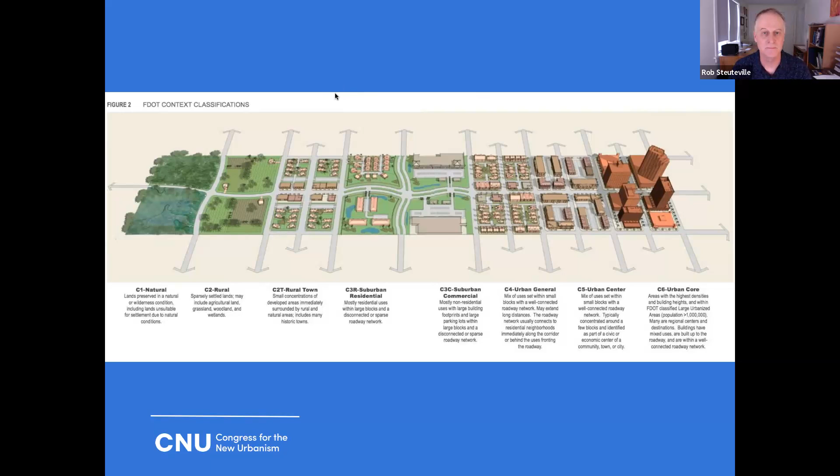First, there's going to be a presentation followed by a brief discussion among the panelists, and then Q&A from the audience. So please use the Q&A function of Zoom to ask your questions as they occur to you. I'm going to pass this along to Billy and DeWayne.

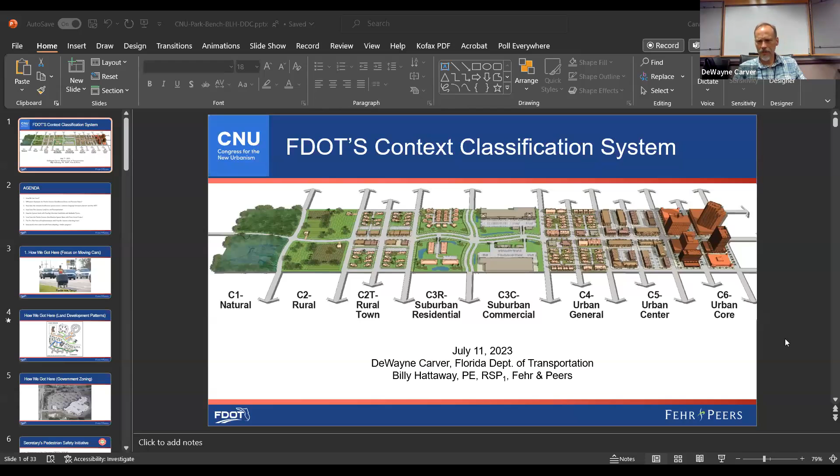Thank you, Rob. Okay, I'm sharing my screen. Perfect. All right, Rob, are you seeing our screen? I don't know that I am. I am. Okay, good, and it's in full screen mode. Perfect, DeWayne, thank you. All right, great.

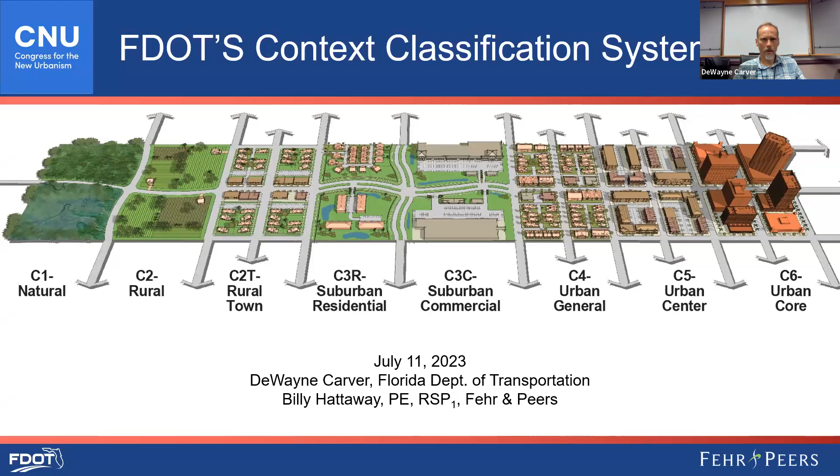DeWayne and I have included our emails at the end on the last slide, in case you have further questions, you can always email us. Rob, how will questions be answered if we end up running out of time and you have additional questions? Is there any mechanism for following up, or should they just contact us directly? They could put the questions in the chat, or email me or email you all and get more questions answered.

Perfect, thank you. Go ahead, DeWayne. So as you saw in the first slide, we're going to talk about how we got here. From a transportation perspective, having been at Florida DOT for 28 years and having been in the industry for 45 years, most of which was in Florida, our focus in the transportation industry has really been on moving cars.

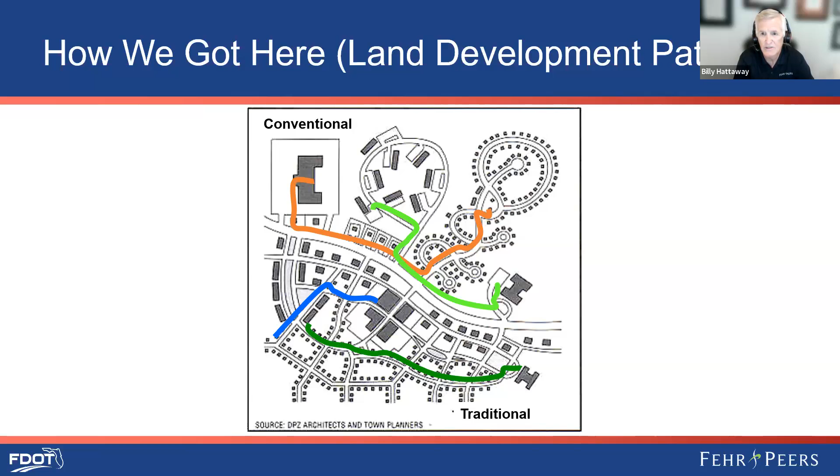Next slide. When I talk about the fact that it's not just the network, but it's also the land development regulations and government zoning by local agencies - Florida DOT does not control the adjacent land uses. That's controlled by local governments. They have a role in creating these issues because, again, cul-de-sacing these developments onto the state and U.S. highway system along with their own roadway systems.

So how did we get here? Back in 2011, the Complete Streets Coalition, an element of Smart Growth America, put out a report called Dangerous by Design. And basically it said these four major metropolitan areas in the state of Florida were the most dangerous in the country for pedestrians and bicyclists.

And the secretary had recently brought me back to Florida DOT to be the district secretary in Southwest Florida. At our first secretary staff meeting, he said, Secretary Hattaway is here to help lead a statewide initiative to improve pedestrian and bicycle safety. And he said, while we are always proud of being #1 as state transportation agencies in so many areas, being #1 in pedestrian fatalities and serious injuries is not where we want to be.

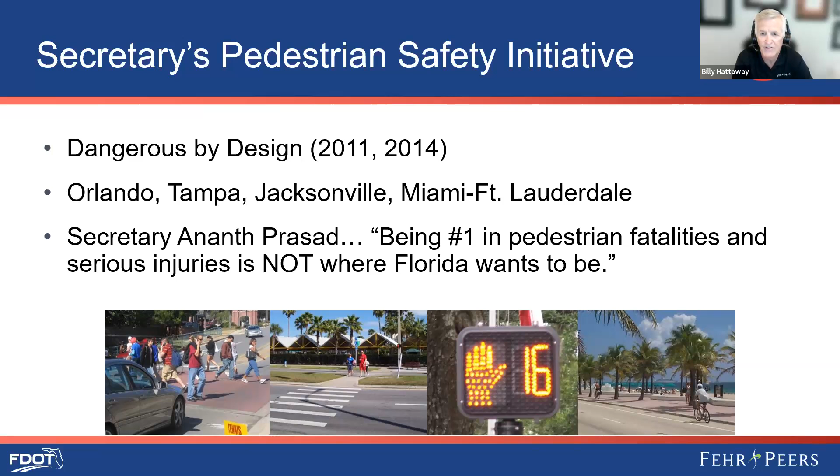Next slide. A big part of the problem is that almost all of our system, the Florida DOT state system, our posted speeds are generally in the range of 45 miles an hour on our arterials. We do have lower speed roadways through communities, but by and large, most of our 4 and 6 and 8 lane roadways are 45 miles an hour and higher.

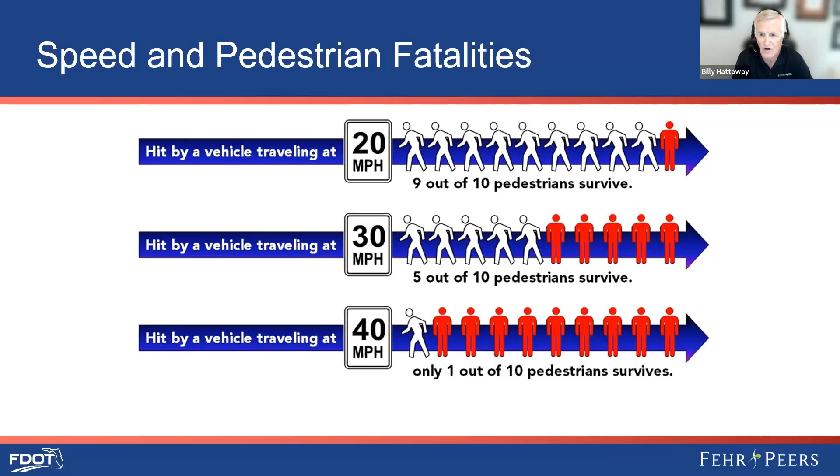And you can see if you get hit by a vehicle at that speed, only about 10% of the pedestrians survive. And chances are you're going to have a lifelong disability that you just cannot overcome. Likewise with 30 miles an hour. So low speed is a key element that we're going to talk more about throughout this presentation. Next slide.

So in fact, in 2014, DeWayne and I went to the Probike Pro-Walk Conference, and we wrote this policy. I had convinced the secretary at the time that we couldn't keep designing our streets the way we were and expect different results. That's always been known as the definition of insanity.

So we wrote this policy at that conference, and the secretary signed it, which was the start of our journey into Complete Streets. And then the Complete Streets Coalition - I'd run into the executive director at the time, and he told me that they had just finished helping another state agency develop their complete streets implementation plan. And I said, I'll be calling you back shortly.

The result of that is because of the implementation of the context classification guide and the incorporation of all of this into our design manual, the Complete Streets Coalition actually provided Florida DOT an award for what had been done in the state of Florida, which I was gone at that point in time, but I was very proud of the work that continued on, thanks in part to what DeWayne and Michael Shepard, the state roadway design engineer at the time, did. Next slide.

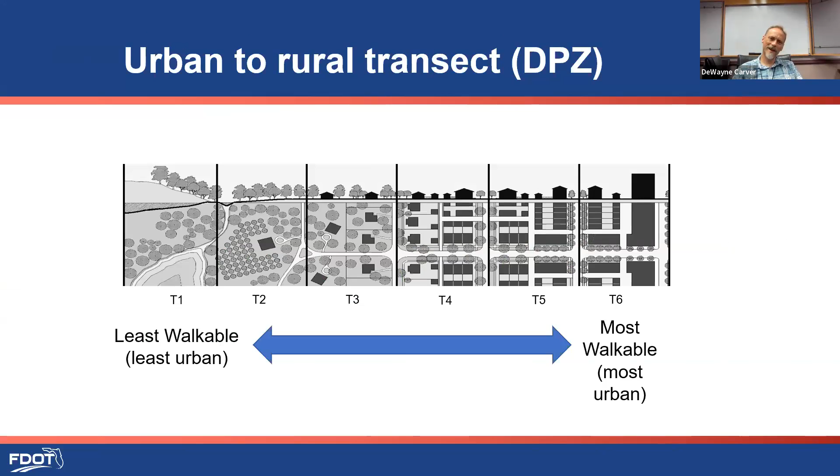You can begin to assign aspects of the built environment based on where you are in space along that. So it doesn't take a lot of imagination to go from that up to this, which is our context classification system. This is, in a way, great.

And we love the fact that we have this context classification system. But in talking to new urbanists, sometimes this will throw you a bit, because you may want to think that this is a one-to-one kind of thing. And it's not quite that way.

I'm going to talk a little later about how this fits into your form-based code if you have one. But the key thing to take away is that the purpose of the context classification system is to give your transportation folks a way to think about the roadway.

And in Florida, the DOT controls the road. We do not control the land use. And so we could not have a system that required the department control the land use in order to classify something.

And so the way our system is set up, the context classification is actually kind of reactionary. Now, it'll let you do things in the future as well, but it starts by looking at what's on the ground today. So if you imagine this is your state road going through the middle of the diagram here, from left to right, you see it passes through all the areas we'd recognize as transects.

My C1 natural conditions, C2 rural, I have a rural town there. I go through my suburban areas, getting into general urban on the right, and then working my way over to my urban center and then my urban core.

Now, in most new urbanist areas where you've used new urbanism and applied the transect, you'll have all of those done. We made a few changes to this for our context classification system that sometimes trip up new urbanists.

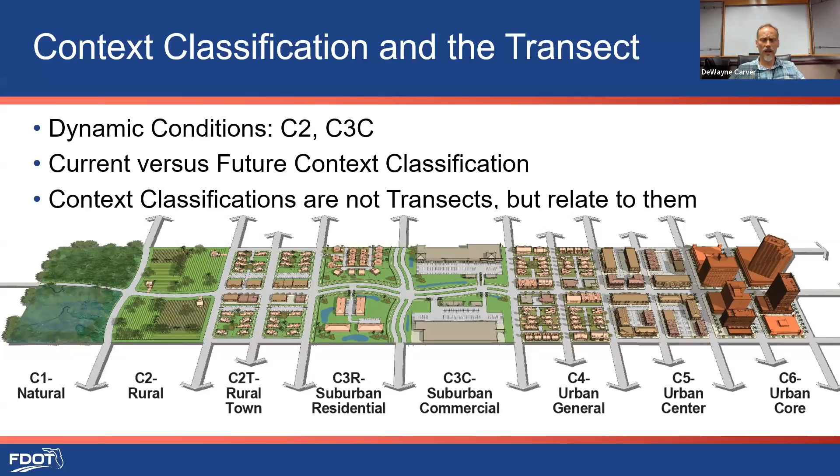This system matches up very closely with what AASHTO has done in the latest version of the AASHTO Green Book, which allows us to dovetail and think in unison with what AASHTO is doing.

So moving on from this, the next great thing about doing this is that it allowed us to create a common language. Rick Hall, who I used to work with at HPE, likes to say the planners speak French, but the engineers speak German. One of the things we did as new urbanists is learn how to translate between those two, and that's what this context classification system was designed to do.

In the past, transportation engineers kind of understood arterial and collector, urban and rural, but that was about as deep as it went. Planners had a hard time conveying why an urban arterial in a downtown would be different from an urban arterial in a rural condition, particularly in terms of speed and design criteria. This was a way to try to get us on the same page.

So we're going to try to create a common language. If you go to the context classification guide—and I'll put a link in the chat in a few minutes so you can take a look—you'll see there's a matrix in there. We call it the matrix.

This matrix on the left-hand side is the information for the planners. It talks about your context classifications and tells you what those would look like in terms of the physical characteristics that would matter to a planner.

Across the top is really the information for the engineers. It talks about intersection density, block perimeters, block lengths. Then there's more information that gets back to the planners about building heights and placement, but these are all things that can be measured.

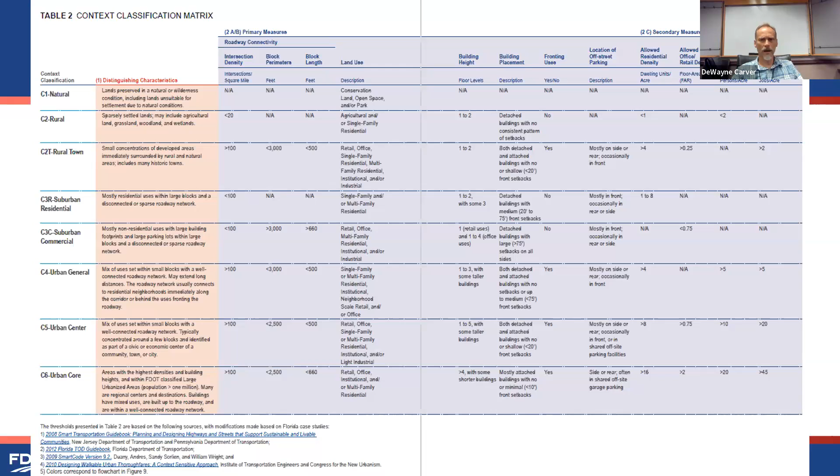This really is the Rosetta Stone that lets you go from talking about roads to talking about places. I want to enlarge this top column so you can see on the left-hand side there's the roadway connectivity measures, and then we have the secondary measures for planning. So this is what allows us to make that connection between what the planners are looking for and what the engineers are looking for.

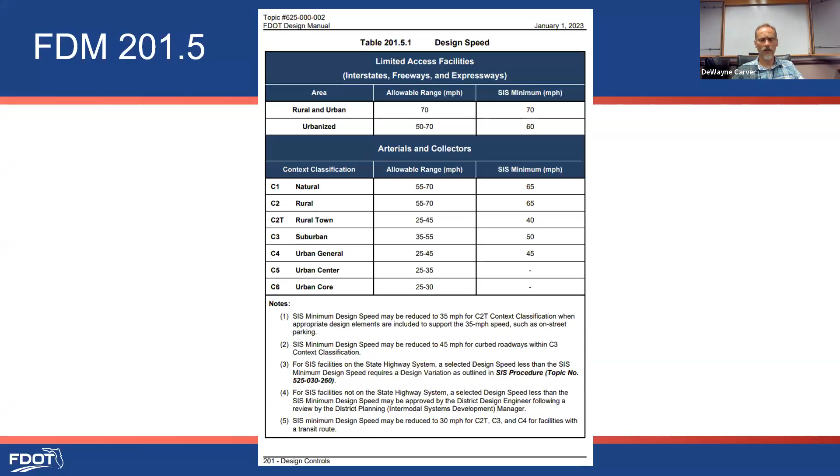There's a lot of criteria affected by that. The most important one really is design speed. The context classifications are assigned a range of design speeds based on how fast we want the traffic going, and that's directly reflective of what kind of character we want that area to have—do we expect a lot of pedestrians, cyclists, and transit there or not, what kind of movements we're expecting, what kind of traffic we're expecting. That's all covered in our FDOT design manual.

So here are our classifications again, and this is one of the ways Billy said we would come back to speed, and this is how we're kind of making this play out. So you have your context classifications, you have your state road. We need to convey to the engineers how fast we want things to move on these roadways.

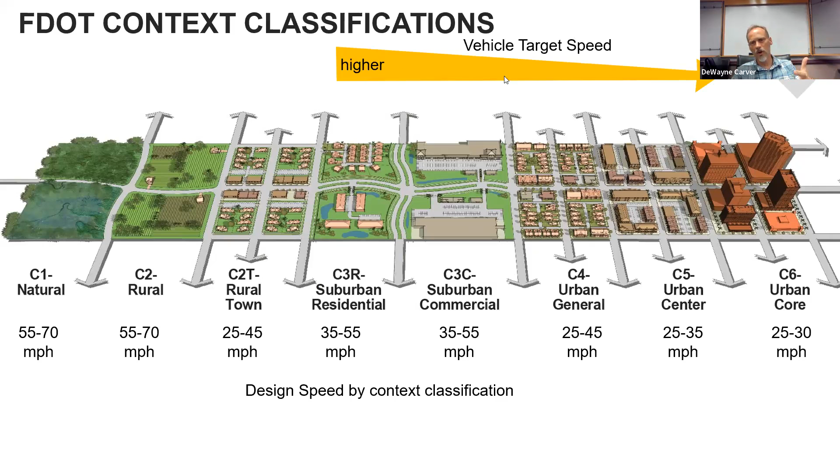The idea is that if you're in the most suburban conditions, you may start in C3 where you have higher design speeds, and work your way down to your lowest speeds, which are going to be in the highest context classifications. Now, if I'm in a rural condition on my state arterial system, it's okay to have high speeds there because I'm just moving lots of traffic very long distances. Speeds are going to go up there.

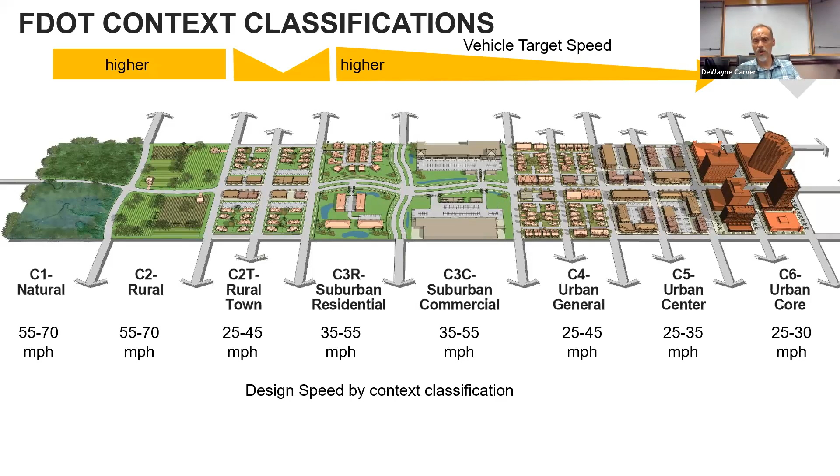But when I get to a small town or someplace, I've got to transition my speed down and then back up again as I leave. So this is just sort of a visual of how that breaks out. And the context classification system allows the planners to converse with the engineers about where we need these speeds to be. And then the engineers get it. Once they see this kind of thing, they're able to understand this is what we need to try to achieve. Now achieving it's much harder, but understanding that you need to achieve it is actually very helpful from this.

Okay, Billy. Billy's going to talk more about connecting land use and transportation, sort of generally beyond just what we've done at DOT, but kind of starting with that. Back to you, sir. Sure, thank you.

So going to how we got here to some extent. The plans preparation manual originally recognized only two types of speeds: high speed, which was greater than 45 miles an hour, and low speed, which they considered less than or equal to 45 miles an hour.

One other thing that is helpful for you to understand is that at the same time this plans prep manual recognized only two speeds, our minimum design speed on any corridor, regardless of context, historically was 45 miles an hour. So if you were going through the heart of a downtown, the design speed would be 45 miles an hour.

Likewise, whereas the Florida design manual recognizes the 8 contexts with the associated speeds, as DeWayne just mentioned. Next slide.

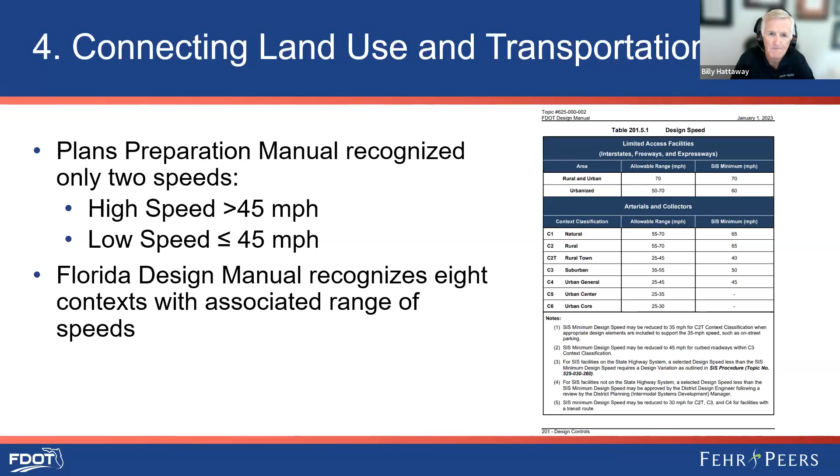So you can see, as he mentioned previously, the range of speeds on this chart. The one thing that we were able to get in place, and DeWayne's going to talk more about this later, is the target speed. So the target speed, the design speed, and the operating speed, we want them to be the same.

So the days of adding 5 or 10 miles an hour during the course of design to what was the intended design speed is something that's historical. We are no longer doing that, nor should anyone in the industry be adding additional speed to what the intended posted speed is going to be once the project is built.

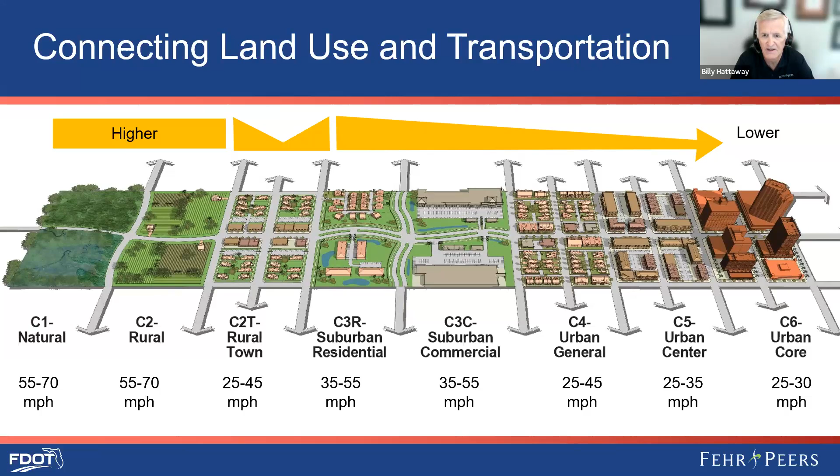Next slide. Likewise, the plans prep manual only recognized 2 sidewalk widths. If the sidewalk was at the back of curb, it was 6 feet wide. If it was separated, it was 5 feet.

And likewise, travel lane widths are handled the same way. Basically, at DOT, if you were putting in a travel lane, it was expected to be 12 feet in every case. Now the engineers have much more flexibility, using a 10, 11, or 12-foot travel lane, again based on context. Next slide.

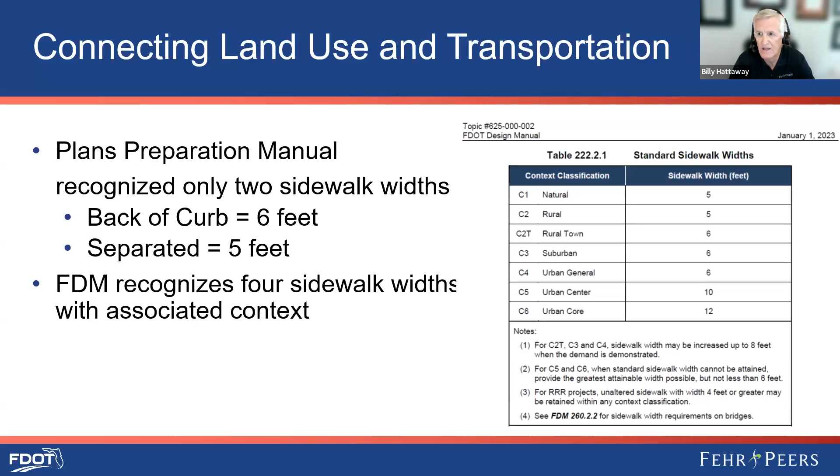It would be classified as a C2 basically, and they had intended to want this to become more urban to get the speeds down, because there's an elementary school less than 50 feet away from this roadway. So DeWayne, go ahead and pan through these photomorphs.

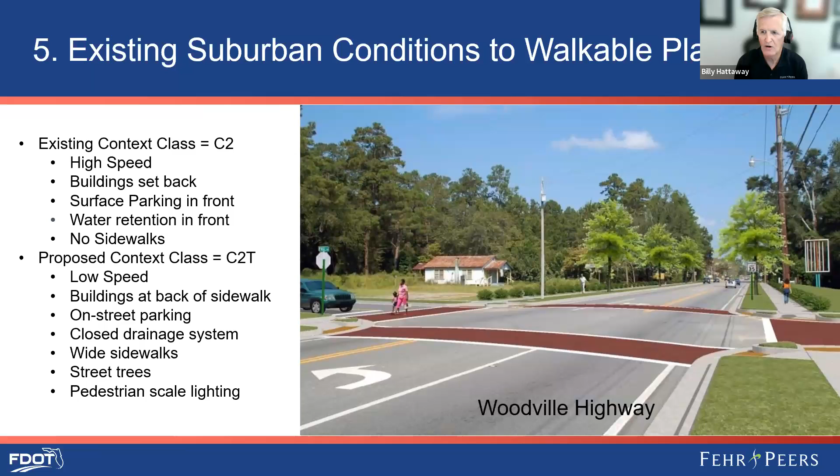So adding sidewalks would obviously help, and trees would help. But if you want to get the speeds down, you really need to get the buildings to the back of the sidewalk with on-street parking. Then you can realistically have a 25-mile-an-hour speed operating through this 2-lane rural corridor.

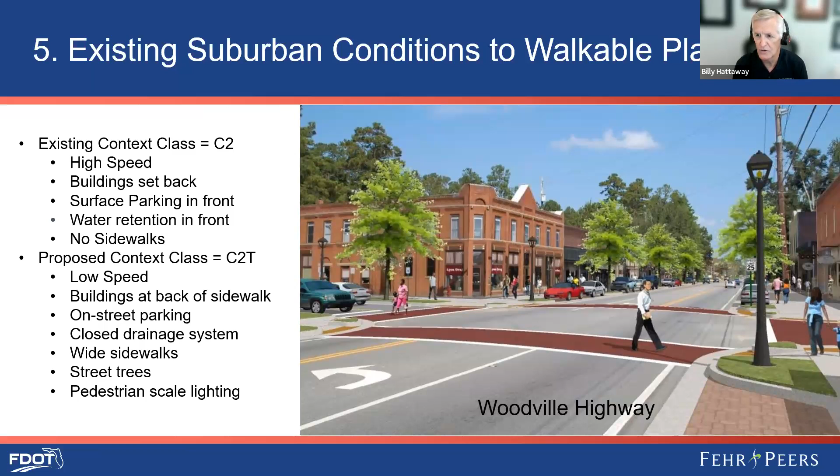Let's go to the next illustration, Johnny Dodds Boulevard. This is a project DeWayne and I worked on at HPE, funded by the community as a master plan in opposition to interchanges at every signalized intersection. You can see the conditions—businesses were struggling along these frontage roads. So we worked with Dover Kohl to come up with a plan.

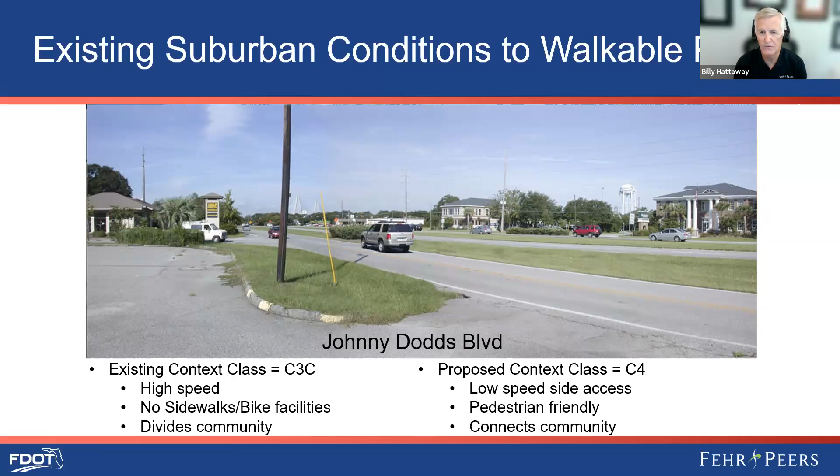Let's go through those, DeWayne, and show how it could be transformed over time—bringing the buildings back, putting on-street parking on the side frontage roads, putting in trees for shade. There's actually a multi-use trail between the side access street and the continued through corridor. The next image shows we left room for transit or additional lanes in the median.

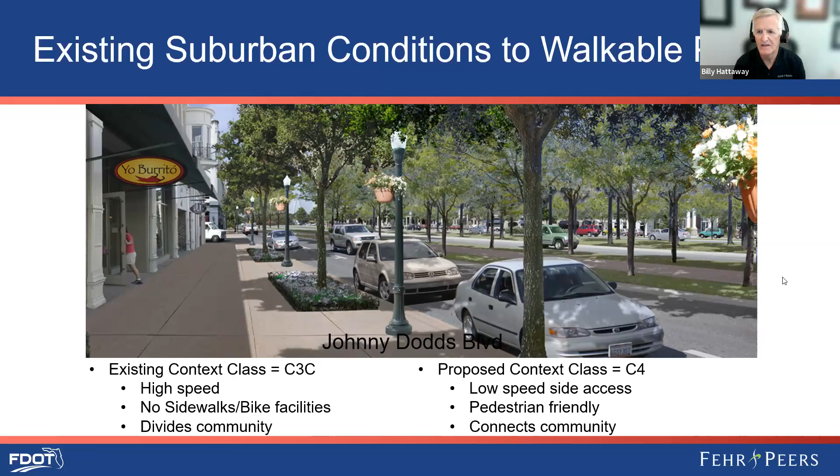I think that should come up. Oh, maybe not. All right, go ahead, DeWayne. I thought I'd included that. Oh, there it was. So back to you, DeWayne.

So we wanted to talk a little bit about how this context classification can work with form-based codes. A number of cities in Florida have adopted form-based codes, and it's a good question—we like the form-based code, and the context classification system was specifically designed to help you integrate with your form-based code.

Billy can tell you one of the reasons that drove our Complete Streets efforts in Florida was that the department was getting tired of, and it was costing a lot of money, going to a town to do a roadway project, and then the town rolls out street standards they've got—maybe context-based, maybe with transects—wanting things we couldn't do on our roadways given the conditions he just described under the plans preparation manual.

So the idea was to come up with a language we could design our roads around that the locals would also be speaking. And that's ideally what this form-based code idea would be.

So in the context classification guide there's a table, table 5, that talks about the relationship between the FDOT context classifications and the SmartCode transect system. Now your form-based code may be the straight SmartCode, or it may be a variation of it—we're using this as the gold standard. But if you can figure out how to get from the SmartCode to your particular code, you can figure out how to get from the context classification as well, because this links those two things together. Some things are very similar.

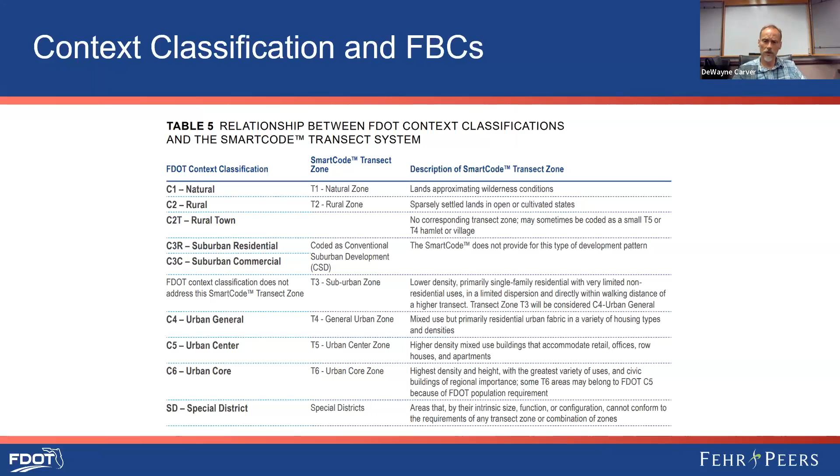Our design criteria are for arterial streets. If you apply them to local streets or collector roads, our criteria are probably going to be too big and too fast for those roads. For instance, you can't get to a yield street under FDOT's context classification-based criteria, because you wouldn't have a yield street on an arterial road. You need those on local roads. So as you develop your local street standards, you'll have to create those for your own streets. You can use our context classification nomenclature if you'd like, but keep in mind the criteria will need to be fit to your own town and for those other contexts or functional classifications as well. I'm glad to answer questions about that when we finish the presentation.

We had some questions, so I want to talk about this first five years of implementation and how it's working. I'll try to go through that pretty quickly.

Basically, we started with the FDM. We put context classification there first because we realized a lot of different manuals at FDOT looked at our design manual. So when we put it in there, it kind of required them to begin adopting this as well, and that's exactly what's happening. It's finding its way into our planning, traffic operations, and safety manuals. Even maintenance has come to us asking if they can use context classification for their work.

That actually was a place where it was not that helpful. They wanted to know if context classification could help figure out where pavement was going to wear out faster. It was worth a shot, but it turned out not to really work that way. In other places though, it was very helpful - for instance, in our safety analysis.

What we found in our DOT, at least, was that this was not a hard idea for people to get their heads around. It actually seemed like something they were prepared to think about and wanted to think about. I was honestly a little surprised how quickly they adapted it, and they've just taken off with it.

So these are just some of the manuals that have begun adopting context classification. Some of them are just starting, so we still have work to do, but at least they're talking about it and now have this language there that we can work with.

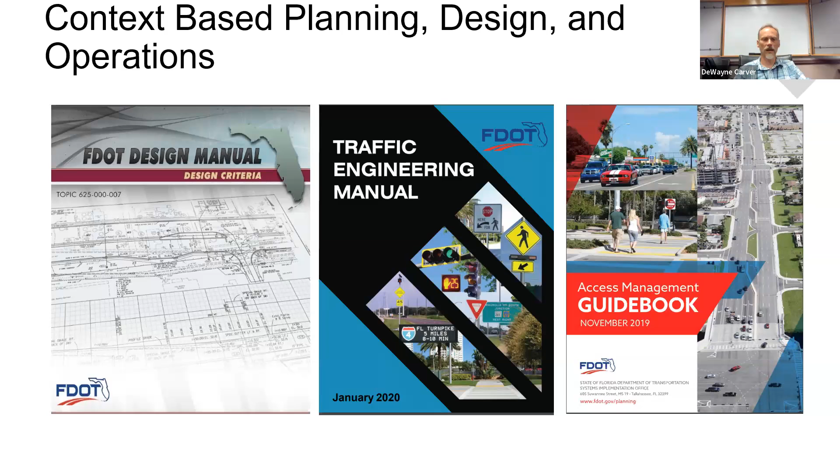One example of how we've used it to understand things better: we looked at our safety and bicycle and pedestrian injuries from a context classification perspective, and it helped us narrow in pretty quickly that most of our safety problems occur if you're in a C3C or C4 context classification roadway - the odds are you're more likely to have the safety issue. That got us looking at what our design criteria are there, what types of uses and people we have there, what kind of transportation they're using, and really finding another way to grapple with this problem.

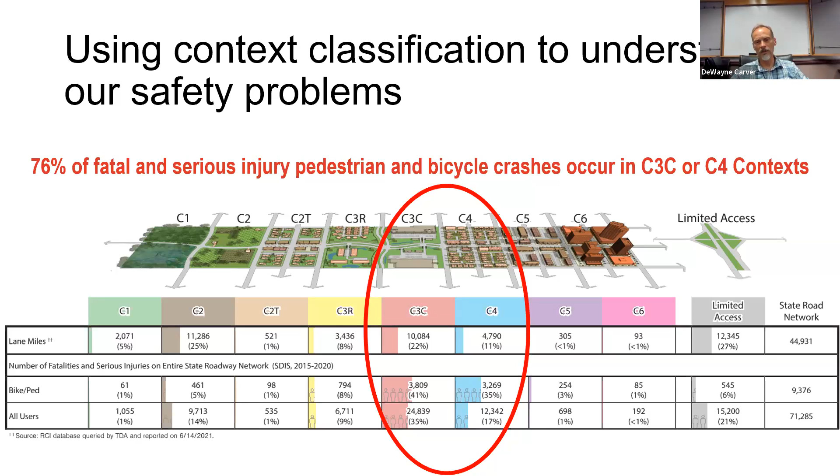So rather than spreading all of our effort across our entire system, we can focus our efforts where hopefully they'll be of the most use.

This is what Billy was talking about also with target speed. Knowing the context classification helps us on a project understand where we need to start with our target speed. In C1 and C2, we start by assuming we want to start on the high end of the speed range, and then justify why we would go any lower. In the other contexts, we may start on the lowest end and justify why it would be higher. So let's say we want to start at 25 - well, why would I not use 25? There are good reasons why you might not, but you need to justify that. You don't start by saying 45 and then talk your way down.

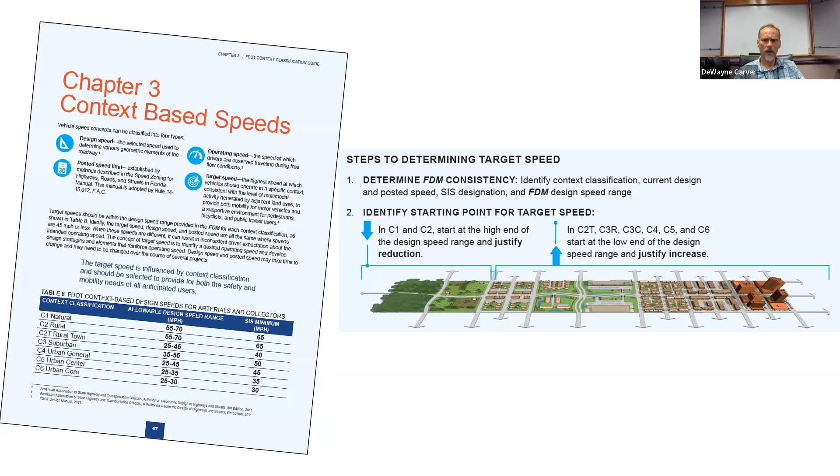Lastly, we wanted to cover - if you're not in Florida, and a lot of you I think are not - why would you even care about this? Billy, you want to explain that to us?

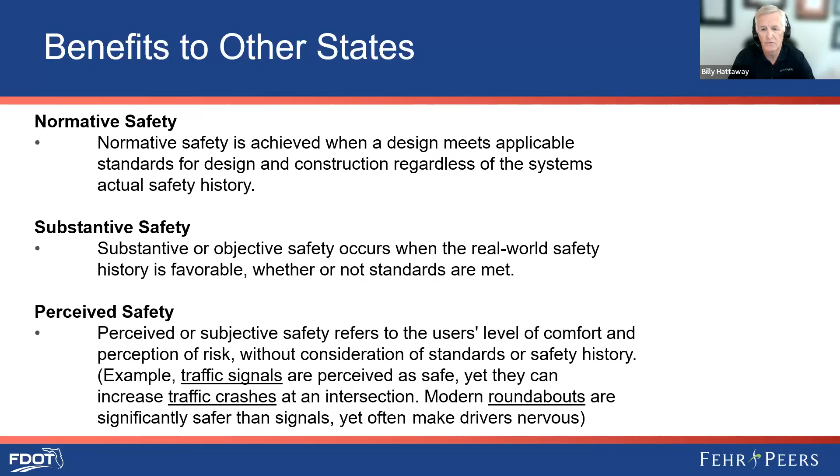Vision Zero and safe systems, just a quick overview. Our traditional approach has been we're trying to reduce crashes, and that fatalities are just going to happen. With Vision Zero, it's a totally different approach — it's focusing on fatal and severe injuries. For example, at the city of Orlando, when we implemented our Vision Zero action plan, we found that three short segments in each of our commissioner districts accounted for between 28 and 79% of all the fatalities and serious injuries within that district's geographic area. So if we could reduce the fatalities and serious injuries on those corridors, we would be able to accrue double-digit reductions in fatalities and serious injuries. I think this is the benefit to other states: using complete streets as an approach to improve safety for vulnerable users.

And with that, I think we've covered everything, Rob, that you were looking for us to cover, and now we're available for questions or comments, I guess.